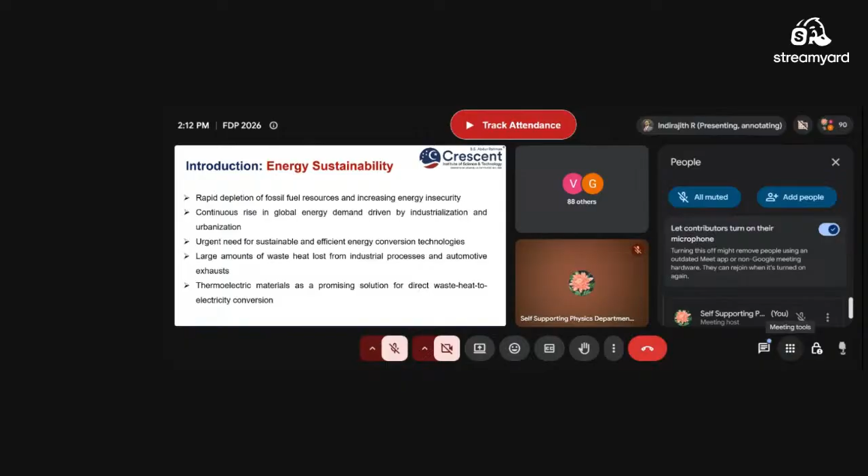Global requirement for electrical energy is also very high. Nowadays, without electronic systems or electrical energy, we cannot pass even 1 hour - that's how we are practiced. So thermal to electrical energy conversion is something we need much more. For this, thermoelectric material is a promising solution to meet our requirement without affecting our environment - this is the concept of energy sustainability.

Why do we need thermoelectric? In thermoelectric material, we don't need any moving parts, and there are no chemical reactions. For example, in a nuclear power plant, thermal power plant, or hydro power plant, there are moving parts, which require maintenance work, so the cost is very high. But in thermoelectric, we are not having that.

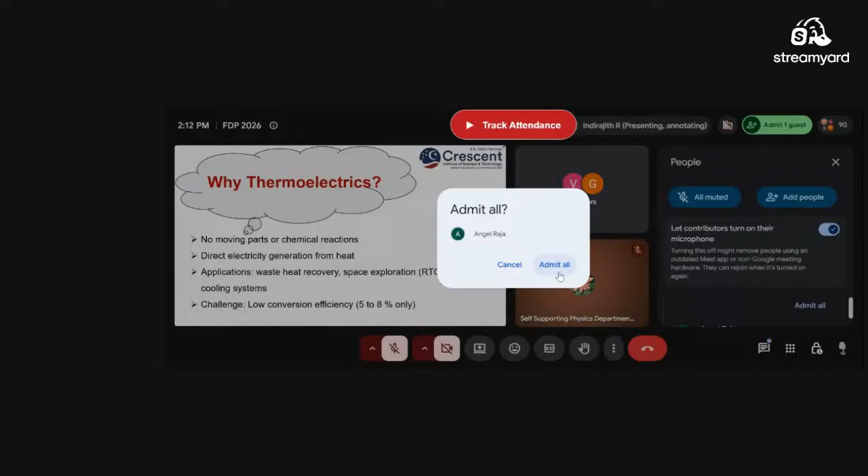The electrical energy is directly converted from heat. And we are using only waste heat for recovery. In space exploration, they are using radioisotope thermoelectric generators.

As I told, what is the challenge we are having now? We are having efficiency of the thermoelectric material only 5 to 8% as of now. So this is really a challenge - we have more opportunity to work on this in order to enhance the efficiency of thermoelectric material.

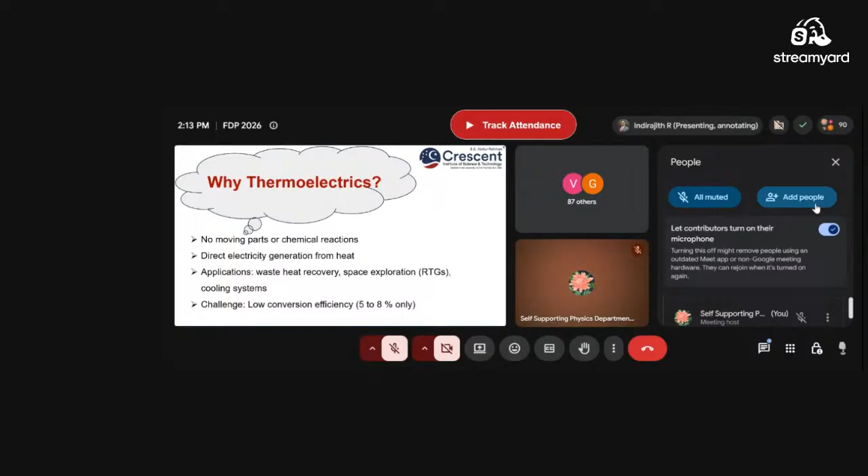When talking about thermoelectric material, the figure of merit is a very important point. When this figure of merit has a higher value, your thermoelectric material has higher conversion efficiency. This figure of merit value mainly depends on 4 parameters: the Seebeck coefficient, electrical conductivity of the material, thermal conductivity of the material, and temperature. The formula is S square sigma T divided by kappa.

Related to thermoelectric material, we have 3 effects, all applicable to thermoelectric material. The Seebeck effect - most of us know this well - when you have 2 conductors at different temperatures, it is able to produce electrical energy. That's the voltage from a temperature gradient: 2 different temperatures in a conductor produce that. That is called the Seebeck effect.

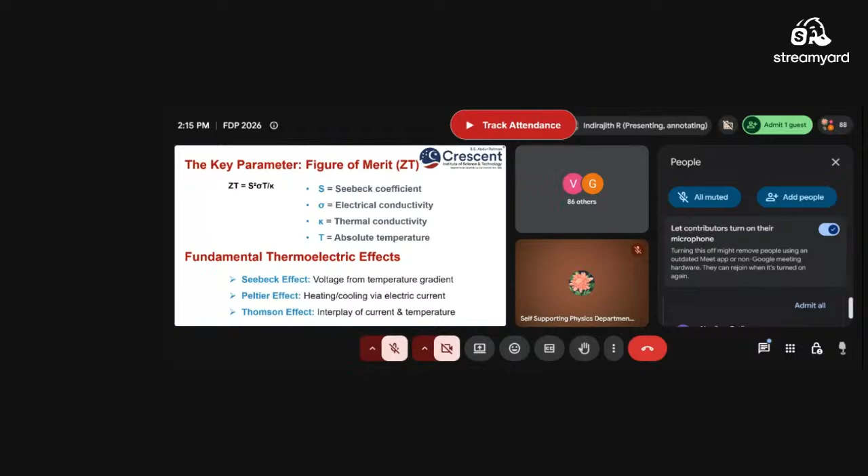And then the Thomson effect - in material like our thermoelectric material, which is a single material, when you change the temperature of the material, it will produce electrical energy. So there are 3 types of effects we are having, and these will be used in the thermoelectric material.

And then thermoelectric material, when we are saying temperature, based on the temperature, this thermoelectric material we can classify into 3 categories. One is the low temperature, less than 300 degrees. So your material working or having the thermoelectric characteristics less than 300 degrees is called a low temperature thermoelectric material.

And then mid temperature, from 300 to 600 degrees, is called a mid temperature thermoelectric material. And then high temperature we call more than 600 degrees. If your material has the thermoelectric nature above that, it is called high temperature.

So here people are mostly working on the mid temperature. Low temperature means we have to limit the application, so conversion we can go for only limited applications. But mid temperature, from 300 to 600, we can go for industrial applications, you can convert the energy.

So low temperature will be used in home appliances, cars and such, we can use low temperature material. And then for high temperature material, we can go for companies and such, using both the mid and high temperature materials.

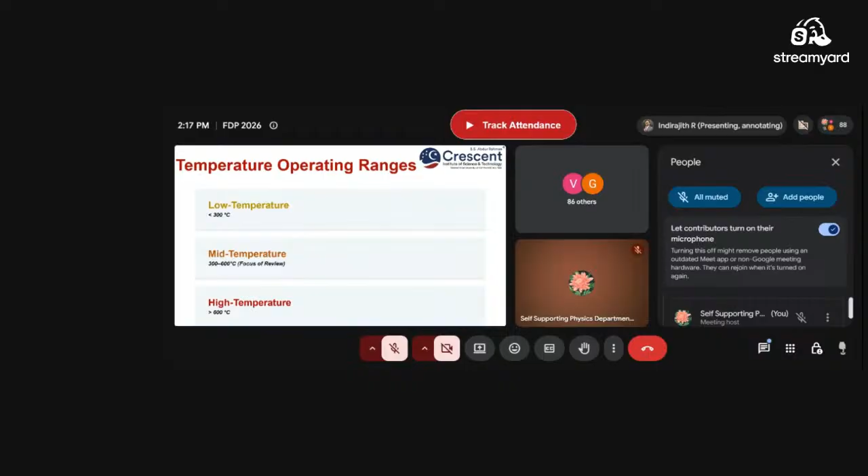And for that we have to choose the chalcogenide material for mid temperature. Why we are choosing this chalcogenide material is because it has a favorable electronic structure. When you take oxygen, sulfur, selenium and tellurium, the outermost shell has 6 electrons. This structure is very, very important for generating the thermoelectric material.

For example, some materials given are lead selenide, tin selenide, tin sulfide, indium selenide. Materials like that have good efficiency for thermoelectric applications.

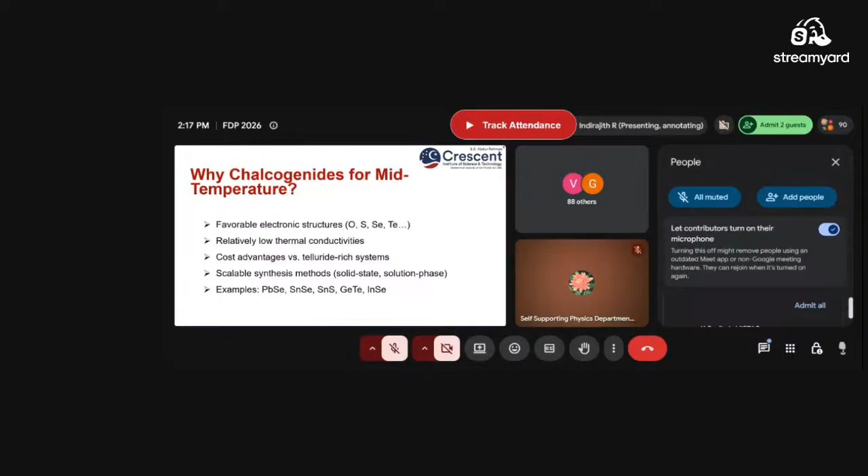And then synthesis method. In the synthesis method, we have a number of methods, but most commonly we are using one of the crystal growth methods, called the Bridgman and Stockbarger method.

So if you want to make a crystal form electronic thermoelectric device, you want to make it in the form of a crystal, we have to go for the Bridgman method. And then if you need a thin film form, we have to go for the direct vapor transport method. And then if you need it in a powder form, nanoparticle form, we can go for the rest of the methods.

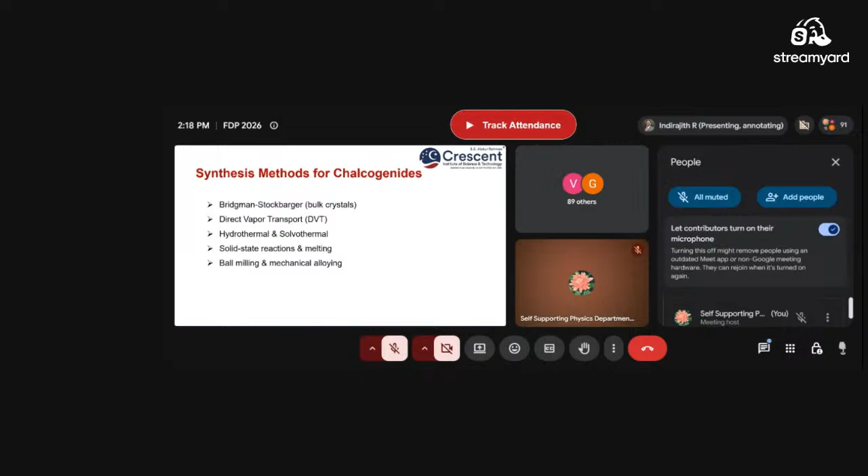So hydrothermal, solvothermal method, solid state reaction, and then melting, ball milling, and mechanical alloying. These will all produce nanoparticles. So in each category we are given one example: in the form of crystal, thin film, and nanoparticles.

So most of you know how we are growing a crystal with the help of the Bridgman method. In the Bridgman method, we have a crucible, and in the crucible we have to load our material. Whatever material you want to grow, we have to fill it, and then we have to evacuate the system.

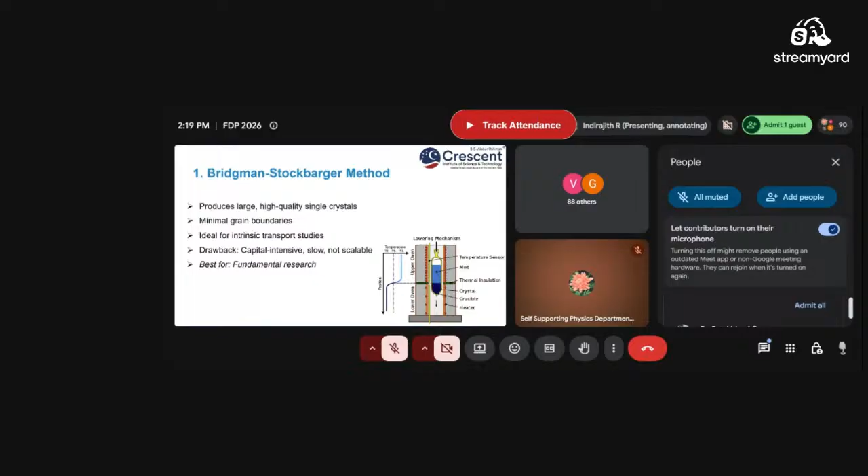And then from top to bottom, we slowly drop the ampule. The ampule has a narrow tip. When it is dropped, the top of the oven, the upper oven, has a high temperature, and the lower oven has a lower temperature. So when you very gradually drop the ampule from top to bottom, when the tip reaches the lower oven, the transformation from liquid to solid happens, and we are able to get a crystal.

And then another method we have is the hydrothermal and solvothermal method. Here we use high temperature along with high pressure, which we apply on the material.

So for example, we are given this setup called an autoclave. In the autoclave, whatever material we want to synthesize, we have to put it in. For example, if you want to grow zinc oxide, we have to take zinc chloride, dissolve it in water, and then add the reactive agent NaOH. Then we keep it in the oven, in the Teflon coated container inside the autoclave, and cover it with the bolt nut assembly given, and tightly close it. Then this whole setup we have to maintain at a high temperature from 100 to 250 degrees.

When you keep it at 100 degrees, since we are taking water as a solvent, the water will evaporate at 100 degrees. So inside the autoclave, a high pressure will be produced. In front of the high pressure and high temperature, the zinc reacts with the oxygen in the gaseous molecule, and then we get the zinc oxide particles.

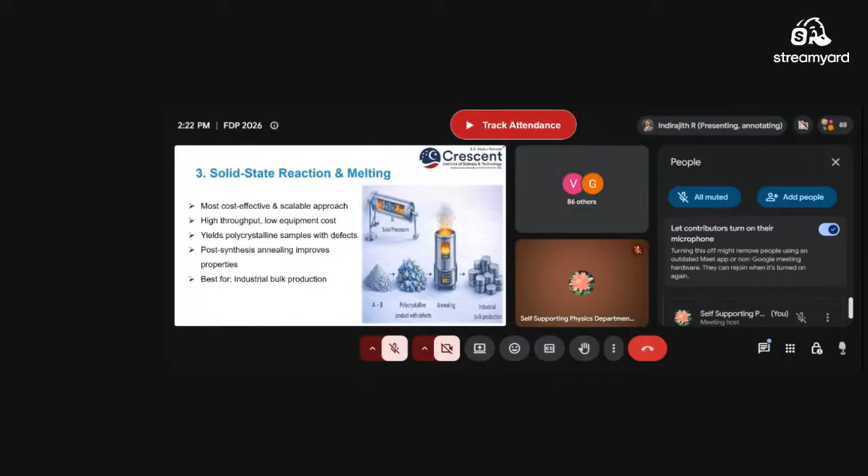And then solid state reaction. Here also we take two components. For example, if I want tin selenide, I take tin chloride and selenium, and grind both together well, and then keep it for annealing at higher temperature, 1000 or 1100 degrees. On heating, the chlorine will be evaporated, and the reaction will take place between tin and selenium, and finally we get the product. So if you want a bulk product, you have to go for the solid state reaction method.

And then ball milling. Ball milling is a very famous technique to produce nanomaterials. Here we use different sizes of balls, and put them in a container. This container we rotate about an axis. While rotating, rolling it like a planetary motion, the ball will roll inside the container. Because of that, the material will be crushed and made into nanoparticles. So that's the ball milling method.

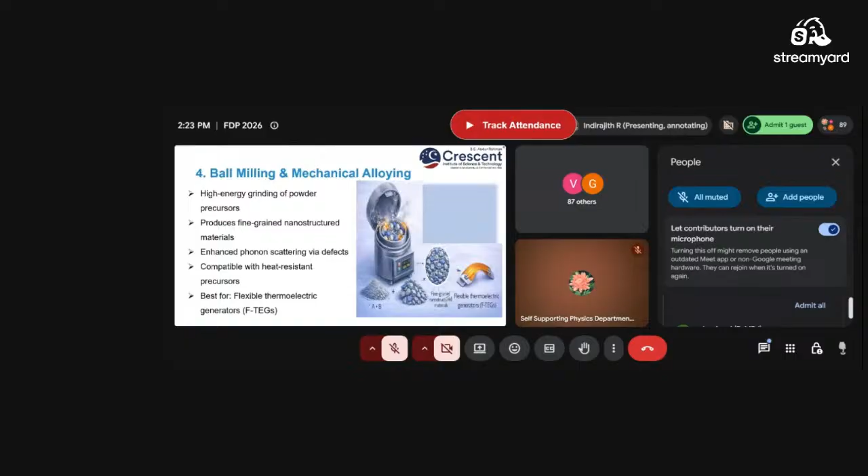And then chemical vapor deposition. This is one of the thin film deposition methods we have. Here we have to evaporate the material, and then with the help of carrier gas, transport it to the thin film substrate and deposit it. For example, if I want to make tin selenide, we take tin and selenium separately and evaporate them. After evaporation, with the help of carrier gas, we send it to the surface of the substrate, and then the film starts to grow.

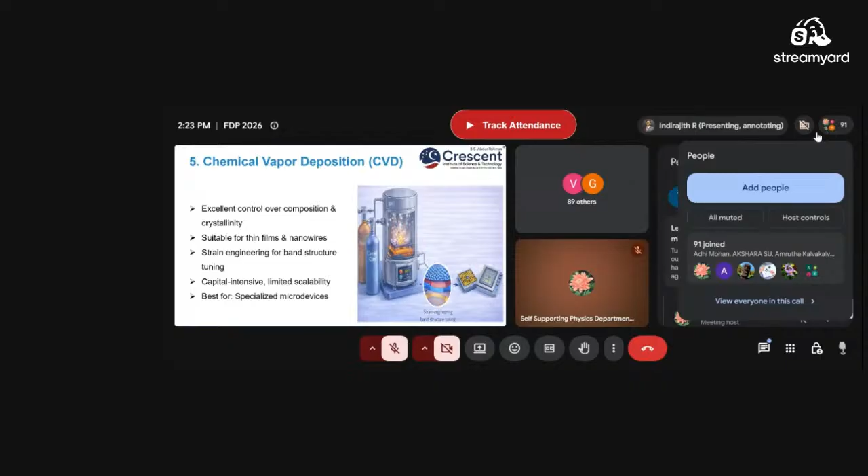So these are all the most commonly used methods to get thermoelectric materials. And then, how do we enhance the efficiency? As I previously told you, in a solar cell, by doping concentration or improving the crystalline structure, we can enhance the efficiency. So like that, what are the different parameters we have to enhance the thermoelectric material?

So the first thing we have is the doping material. While doping the material, we can enhance the Seebeck coefficient value. The Seebeck coefficient, as I already told you, mainly depends on the electrical conductivity and the thermal conductivity of the material.

By doping, we can alter the electrical conductivity as well as the thermal conductivity. So by choosing a proper doping material, we can easily alter the Seebeck coefficient value. For example, we have lead selenide doped with sodium, and it has a ZT of 1.2 at 850 Kelvin. So using different dopants, the Seebeck coefficient value may change.

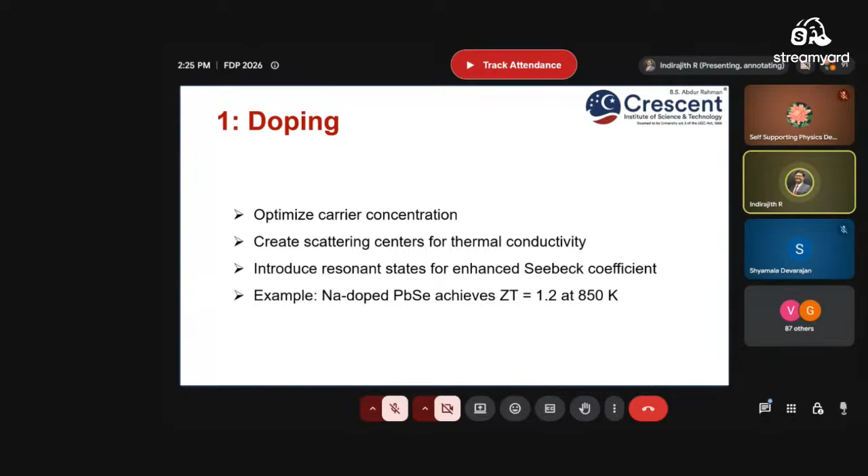And then nanostructuring. We all know the quantum confinement effect. When we change the particle size, the electrical property of the material also changes. So a change in particle size induces a change in Seebeck coefficient. Through nanostructuring, we can control or improve the efficiency of the thermoelectric material.

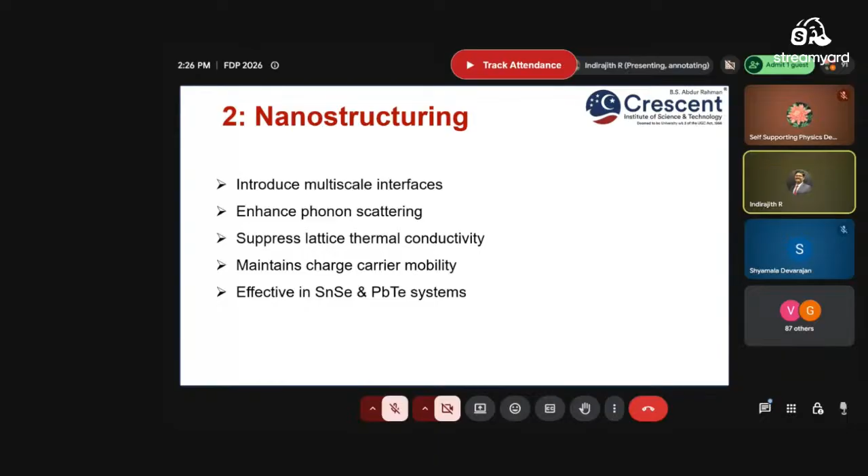And then band engineering. In order to alter the band gaps, we can control the Seebeck coefficient.

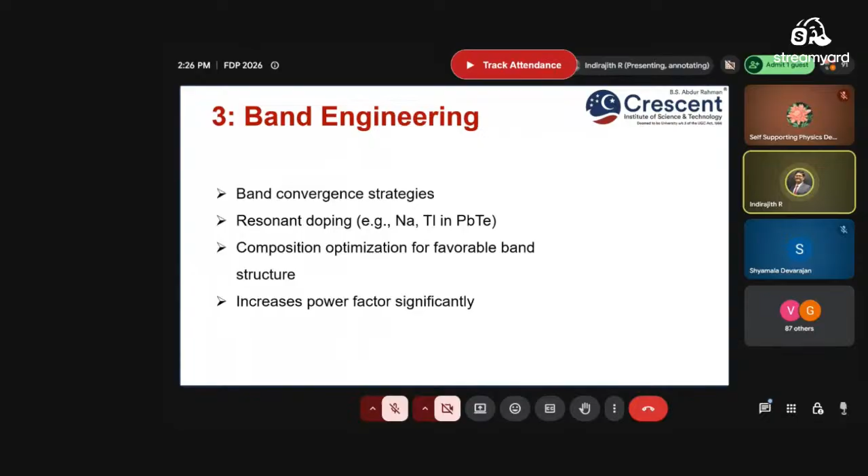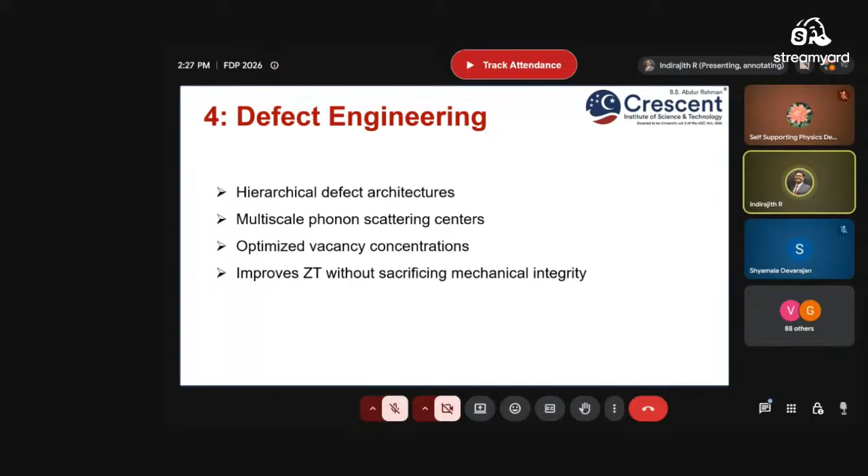And then defects. If you have a solid crystal or thin film, surely you will have some defects. The thermoelectric material works at high temperature, so if there is a defective area, when applying heat energy, the atoms in that defective area will start to vibrate. Due to the vibration, phonons are produced, which causes a change in the Seebeck effect value - it will vary. So we have to minimize the defect. That's the concept we have here.

So as we discussed, by changing the doping, we can increase the Seebeck coefficient by optimizing the electrical and thermal conductivity. Similarly with nanostructuring, using tin selenide, we can reduce the thermal conductivity. And then band gap engineering - by altering the band gap, we can increase the Seebeck coefficient as well as the conductivity of the material. And with defects, we can reduce the thermal conductivity as well as the electrical conductivity, and adjust to improve the Seebeck coefficient.

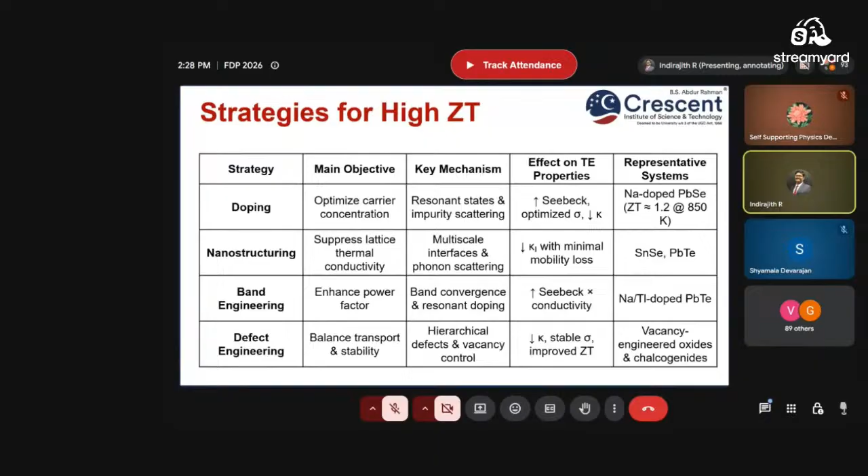And then, how do we characterize? So after synthesis or preparing the material, we need to determine whether the material has thermoelectric characteristics or not. For that, we have to go for characterization.

Mostly in all places we have XRD, UV, like that. From XRD, we can identify what type of material or what type of unit cells we have in the material, and we can identify the planes, all the things. From UV, we can identify the optical behavior, like the dielectric properties. But for thermoelectric characteristics, we have only limited instruments to find them.

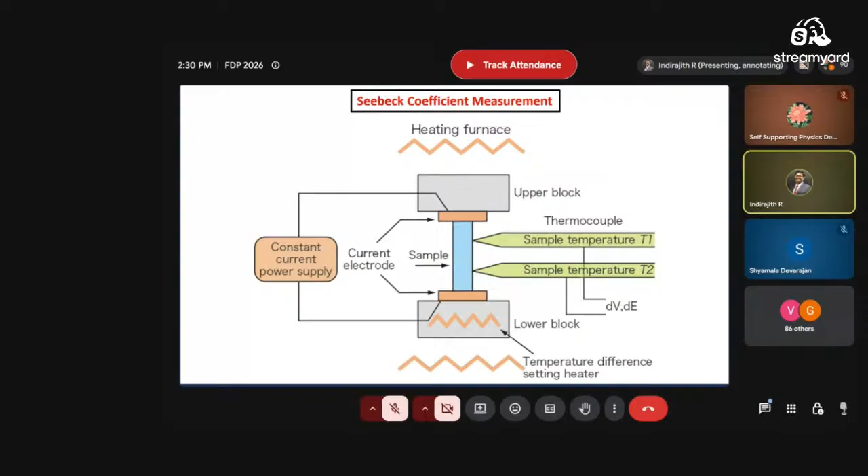At different temperatures, we can see how the voltage and current vary with respect to heating. We have to gradually increase the temperature, and by increasing the temperature, at points T1 and T2, we can identify how the electrical behavior is changing and how much voltage is being produced. So this is an experiment we have.

And then in between the two current, how much voltage is flowing, that we have to measure. After measuring that, by applying Ohm's law, we can easily identify what is the resistance of the material. So from that, we can able to identify the conductivity.

So now what we are doing, this same 4-probe method we are using to identify the thermoelectric material, by changing the temperature. So what will happen is our applying current will be constant, and then voltage will vary, similar to our semiconducting material. So from that also we can easily identify whether our material is having the thermoelectric characteristics or not.

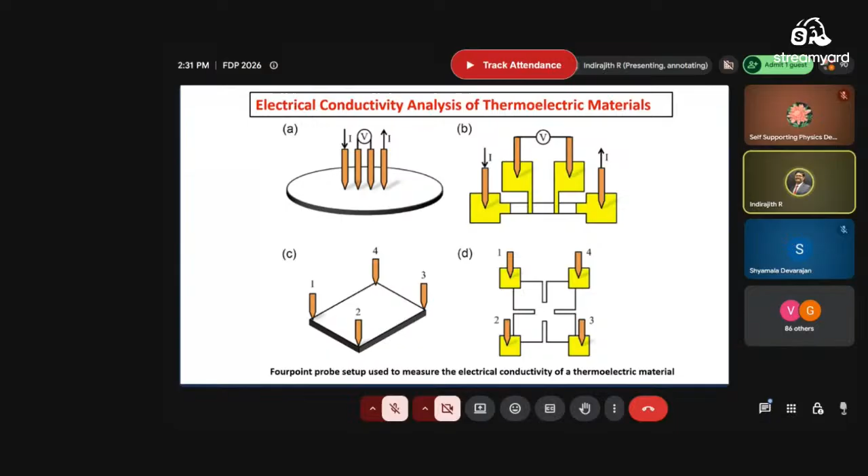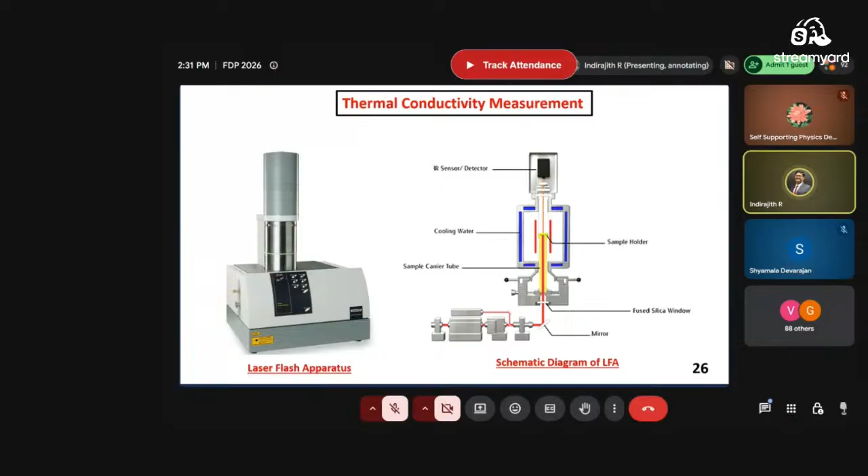So in the previous slide, we showed we are using a heating furnace. And then nowadays, latest, we are having the laser flash thermal conductivity measurement. So instead of a heater, they are using a high power laser. With the help of the laser, we can increase the temperature of the sample and find the thermoelectric nature.

And then in addition to that, we can employ the machine learning process to enhance the efficiency of the thermoelectric material. So already in the cloud, we are having the data available there. So from the data, we can come and conclude what type of changes we can make to enhance the thermoelectric nature.

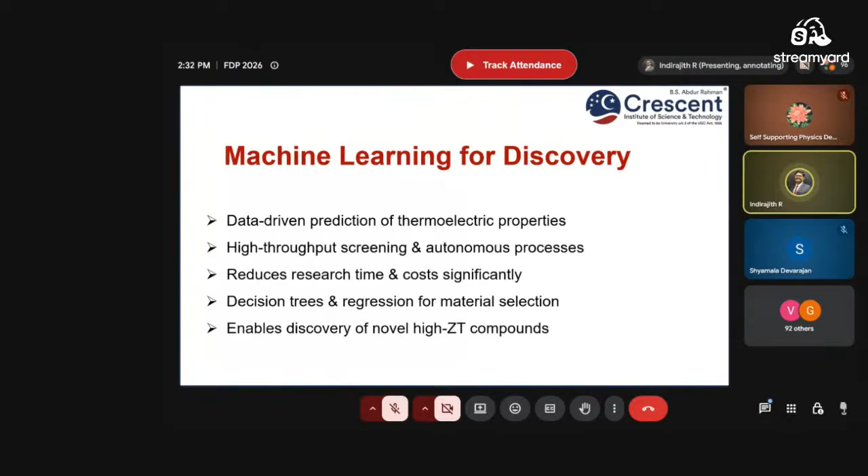And then scalability and cost consideration. So here, if you want to go for the bulk material, we have to spend more amount, and more time will be consumed. So we have to take care of the cost of the material also.

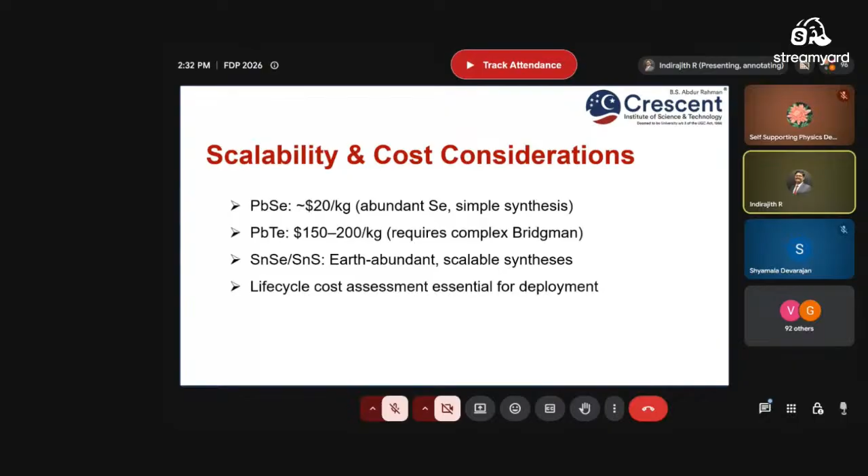And then sustainability and environmental benefits. So as I said in the introduction...

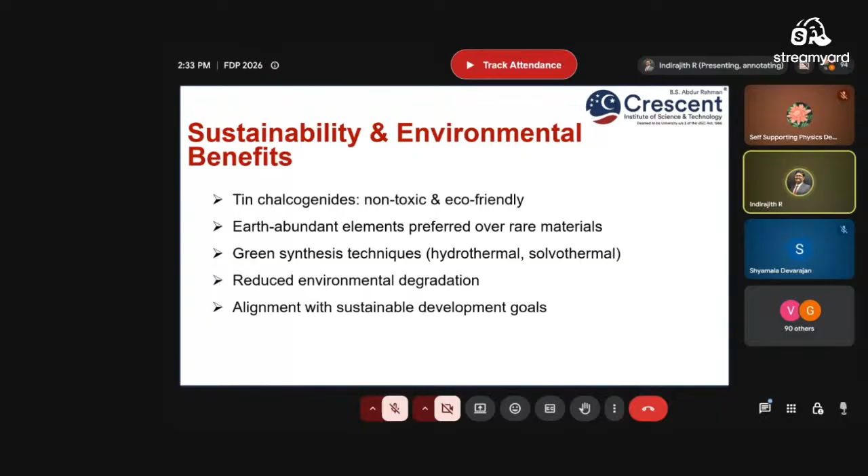Sustainability and environmental benefit. Tin chalcogenides is a non-toxic material and it is an eco-friendly material we are having. It will reduce environmental degradation. We are already using polymer and plastic materials, which take a number of years to degrade. So when we are using this kind of material, it will reduce the contamination in our air.

And then applications. As I told, in automotive, waste heat energy from car engine heat and brake pads can be converted into electrical energy. And then industrial exhaust, we have more heat energy in the exhaust. So when the thermoelectric material is applied on the exhaust or the exhaust pipe itself is made with the help of the thermoelectric material, easily we can produce energy from the waste heat. And then power generation from waste steam also we can do. So all these things we have to make into a device.

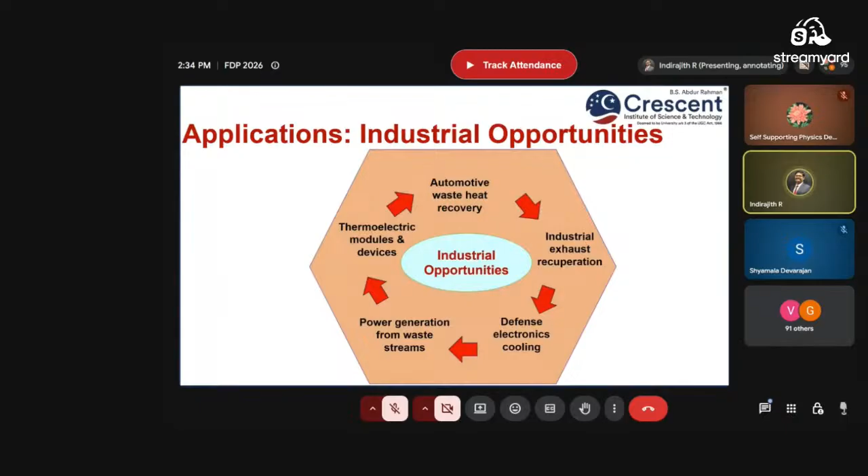And then device level integration. So now the research is going on. We already have solar panels, which convert light energy, sunlight energy, into electrical energy. There we have more heat energy which we are not converting. So now what we are doing is preparing the thermoelectric material and applying it on the surface of the solar cell. The material should be a highly transparent material, so we have to concentrate on that. If your material is not having transparency, it will affect the efficiency of the solar cell also.

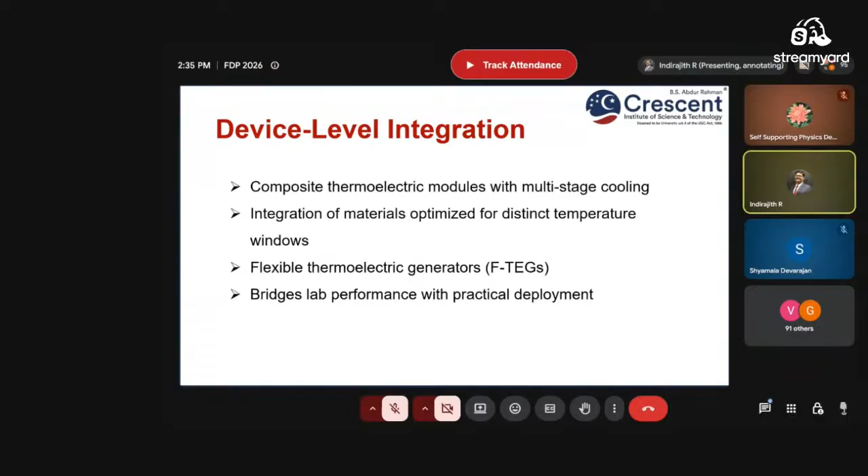So a highly transparent thermoelectric material we are preparing and applying on the surface of the solar cell. So as usual, the solar cell will produce electrical energy, and in addition, this thermoelectric material will also produce energy from the heat. So we are doing research on that.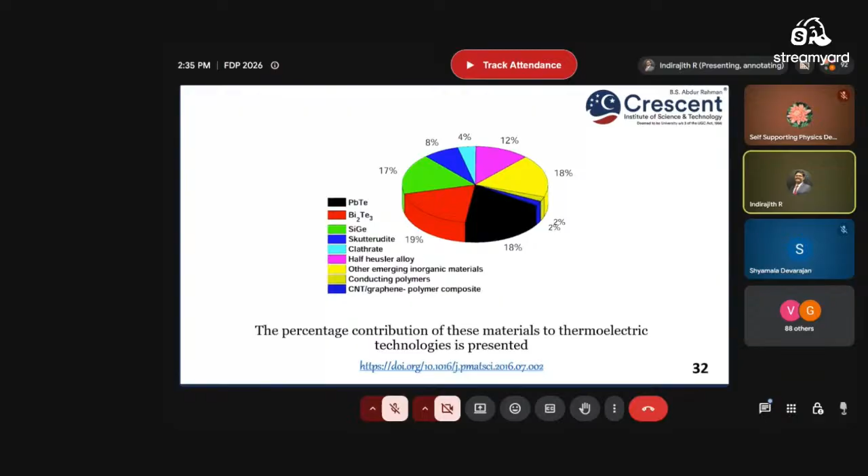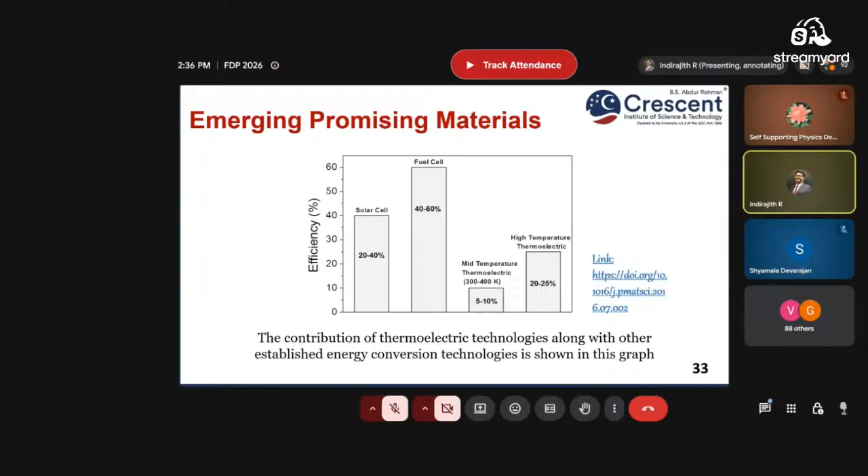So solar cell, as I told, 20 to 40% we are having. We are taking energy from the solar cell. And then fuel cells, maximum we are going up to 60%. And then mid temperature, we are having only 10%. And then high temperature thermoelectric, we are get at 25%. So this is the efficiency of the different type of energy conversion.

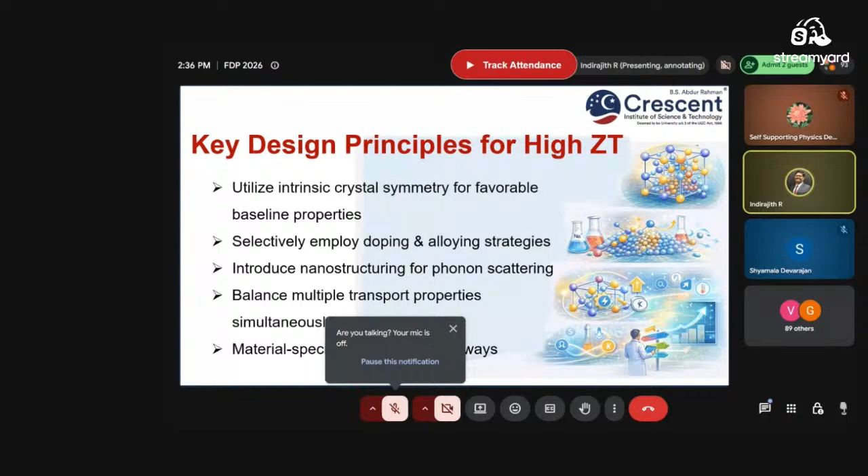And then key design of principle of the high ZT. So when you are planning to fabricate or synthesize the thermoelectric material, we have to keep in mind all these points. Crystal symmetry, the crystal structure, is also very important to get the thermoelectric nature. And then what type of dopant we are using, whether we are going for doping or alloying. Based on that, the efficiency will vary. And then structure also makes a role in the thermoelectric material.

In future, we can go for the atomic resolution. So we are going for nanomaterials research, so that we can take it into the atomic level and we can characterize and identify it. And then we can apply AI and machine learning to get the accuracy of, what type of doping we can do, and what type of crystal structure we are having, to get high efficiency. Like that thing we can do.

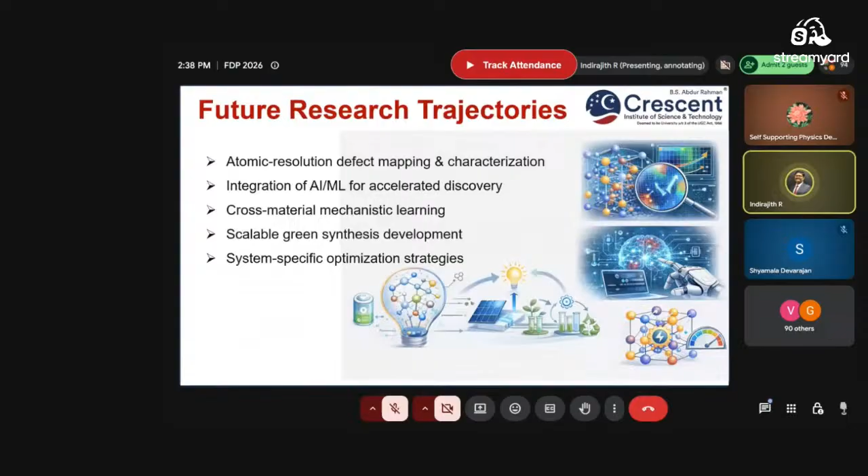And then cross material mechanistic learning. This is a thing we are working on, the cross material. So we are having the thermoelectric material, and in that thermoelectric material, we are doping with the semiconducting material. So here in thermoelectric, what we are doing, we are converting the heat into electrical energy. At the same time, when you take a semiconductor and increase the temperature, the conductivity of the semiconductor is increasing. So when you add a semiconducting material to the thermoelectric material, it will give good efficiency. So that also we are working on.

And then while doing that, what are all the different challenges we are having? If you are increasing the Seebeck coefficient, the conductivity, electrical conductivity, will go down. If you are having Seebeck effect in your material, it can able to produce the electrical charge. Because of this lower electrical conductivity, the material will not get that much efficiency. So considering this point, we are adding the semiconducting material. When you add semiconducting material, it will produce more free electrons, and then it can easily transport. And then lower thermal conductivity may reduce the mechanical strength. And the nanostructure introduces carrier scattering, and then we are having the balancing effect of cost and scalability.

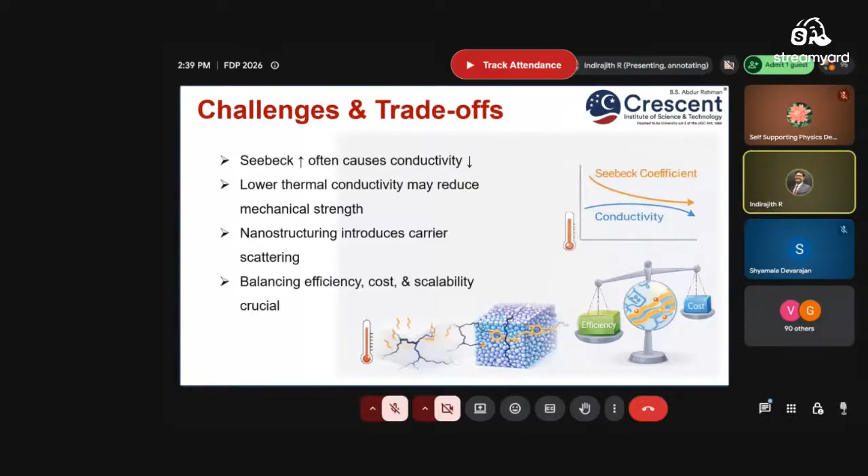These are all the challenges we are having when we are working on the thermoelectric material. And then pathway to the sustainable energy. So next generation waste heat, we have to consider more, we have to convert into electrical energy.

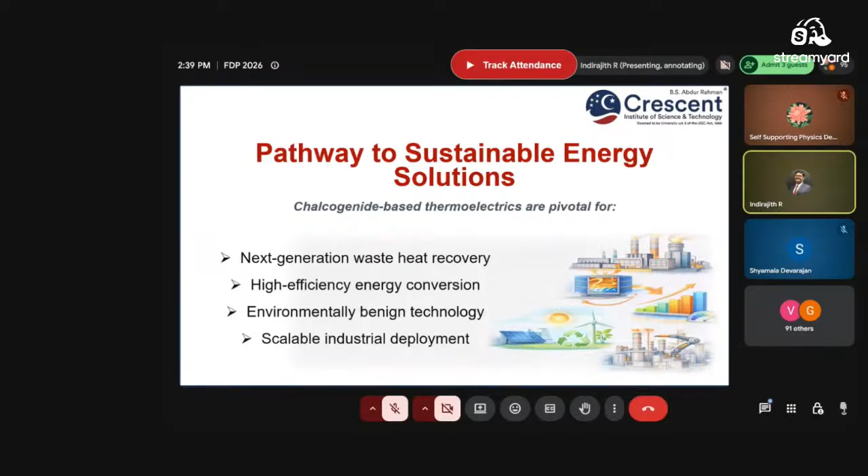So what are the things we discussed here? To comprise all the things, we have provided more detail. So year wise, we are given, and for each material, what are the different types of synthesis material they are chosen, like that. All the things we are given as a review work. So after this review work, we are having a good idea to work on the thermoelectric material. So if in this audience anyone wants to work on the thermoelectric material, we have number of review papers we are having. You can go through that, you will get a good idea.

So why are we focusing on this thermoelectric material? The efficiency, we are having very less efficiency, so that we can enhance. So 10 years before, if you take all the people, they worked on the solar cell, and now they reach the maximum efficiency. After that, we are not able to enhance the efficiency, so we are moving for another alternative method. So this will be a good field for another 10 to 15 years. It will be very good work we can get from this method.